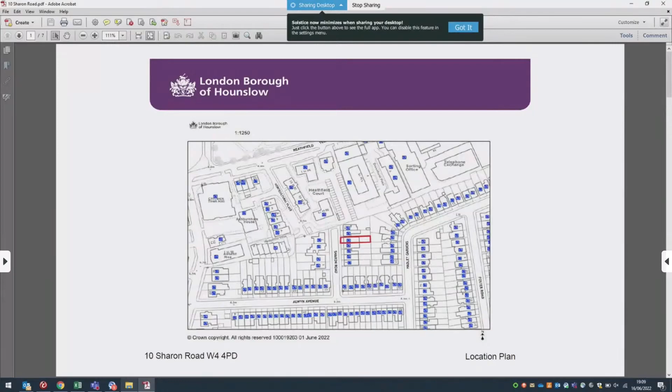Item number 5, number 10 Sharon Road, it's a semi-detached single-family house in the Turnham Green Conservation Area. It is in a flood zone, flood zone 3A.

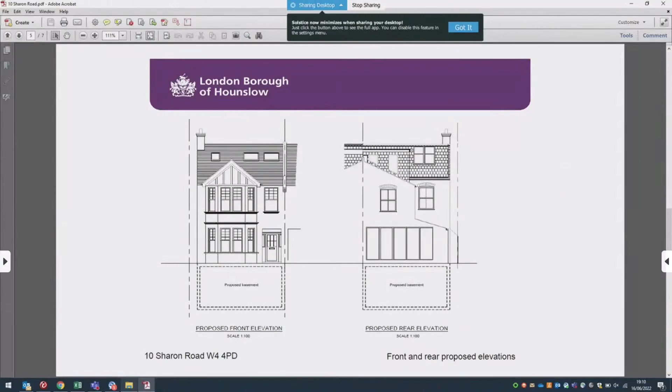The proposal is for the excavation of the land beneath the house to create a basement. It would extend under the entire footprint of the main house and the extension mentioned a second ago. The basement would have internal access to the ground floor level. There will be a front and a rear light well, with a further element of excavation beyond the rear light well into the garden.

We've received 11 representations to the scheme, all objecting. A quick summary of the consultation responses: concerns about flood risk, basements being out of character, the construction impacts of the development, damage to the existing street tree, impact on the structure of neighbouring houses, a lack of need for the basement and the proposed uses, and light emanating from the light wells being visible to neighbouring houses.

Officers are recommending the application for approval. I will come back shortly for the background on that assessment. So back to you, Chair. Thank you, okay.

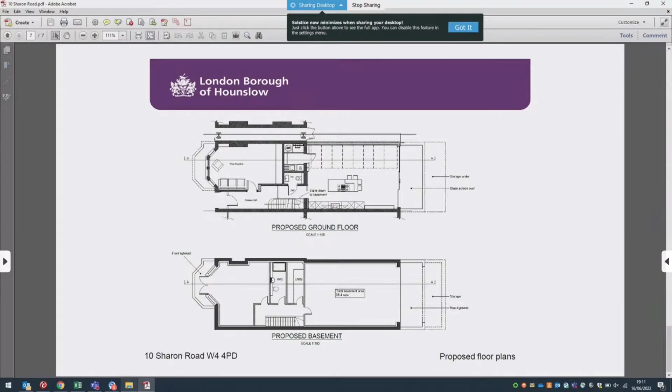I won't be taking up 5 minutes because I think the issue is better outlined by people who live in the road who are here, Tom Irvin and Bob Bond. I'm Councillor Joanna Biddolph for Chiswick Gunnersbury Ward, and I've been in the same position as others here who are here for the first time. I served on the planning committee in my first year, and I remember how I felt at my first meeting, rather at sea.

This is an unusual call-in. Normally, call-ins are about neighbour disputes or big planning applications that are controversial. This isn't about a neighbour's dispute, this isn't NIMBYism, this is actually about policy and is therefore, I think, rather more challenging. You've had a very informative email from Tom Irvin about that. There has also been an update since that in the addendum report, which I don't think Eamon referred to just now. In many ways, that's now more important than the original application because the dispute isn't about a neighbourly issue. I think that's all I need to say, and I'd really like to hand over to Tom and Bob. But it is a policy issue which is a bit more challenging for the planning committee than a neighbourly dispute might be.

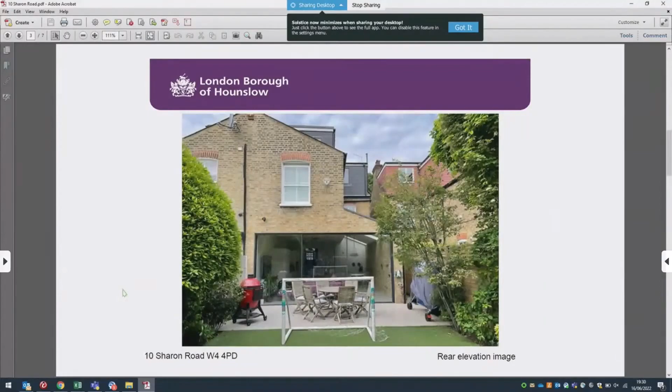Just quickly, you dangled nebulously something in your statement about what questions someone should be asking, and I'd ask you to elaborate on it. So I'm asking you to elaborate on it. That's very kind of you.

Thank you very much. That relates to what I think the planning department may say, which is I had an email last night from one of the officers saying that they checked with the consultant and the consultant had confirmed their interpretation, which I assume they meant about table 4.2 that we've been discussing. It was clear in the questions that the consultant was answering a different question, which essentially was confirming that if there is an existing basement, which there isn't here, then to extend that use would be acceptable as if it was already a less vulnerable use, but to introduce a new highly vulnerable use would not be acceptable.

That is true and it's helpful, but it's not helpful to this application. It's not really relevant to this application. It's not answering the question we need answered.

Thank you. Can I ask the legal, please? This question was asked by Councillor Williams. Is it okay? Can he still stay with that? It seems a bit sort of taken aside. Did you hear that question properly?

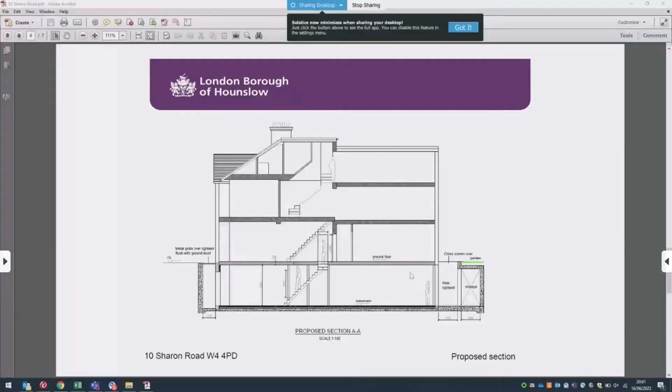Thanks, Chair. Any more questions from members? No? Okay, I'll open it for debate. Anybody? Are we all happy with it? Anybody going to propose?

Chair, I'm happy to move for approval on the basis of what we've heard, following the officer recommendation. We need a seconder. Can I just clarify whether that's including the additional condition to deal with potential noise? Of course, yes, always. Sorry, just on this, what are the conditions we're looking at? The additional conditions that would be useful - Eamon will explain that. Councillor Lal seconded already. Can you explain that, please?

The issue came up about whether there was a need for a sump. So if that need occurs, we'd have a condition that would ensure the sump doesn't create a noise nuisance. It's a fairly standard condition we put on air conditioning units or extraction fans, that type of thing - noise and vibrations.

We'll take a vote as it's been proposed and seconded on the officer's recommendation. Can we have for, please? Okay, 1, 2, 3. Against? Abstentions? It's been carried. Thank you.

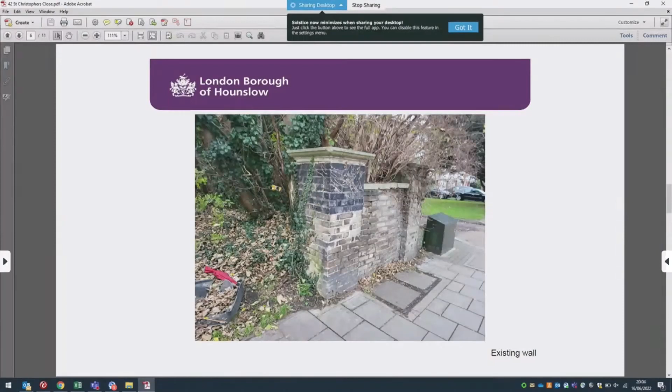It's a 2-storey single-family house, an end-of-terrace house. It fronts St. Christopher's Close. There's a grassed area to the front and the side of the property, running up to the highway, which is not currently enclosed. There's a remnant of a brick boundary wall to the side of the site, which I'll draw your attention to and may come back to later.

Just briefly, a summary of those: they were objecting to the removal of amenity land, the change in visual nature of the open plan estate, obstruction of the public footway, contrary to restrictive covenants on the land, a failure to preserve the character of the conservation area, negative impact on property values, and mention of a fence that had previously been erected without permission. Again, officers are recommending approval.

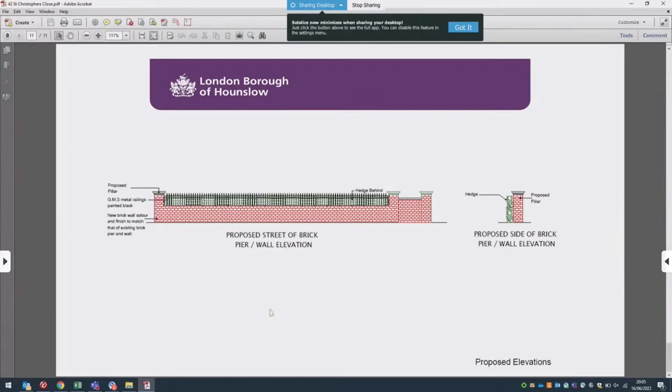Thank you, Eamon. I believe we have 2 speakers on this. Okay, who's going to come, Mr. Foxton first, or? Oh, have we got? Oh, Councillor Chaudhary, I'll give you the first chance. Sorry, didn't realize that, yeah.

And our mayor is going to look after the baby, yeah?

Right, Councillor Chaudhary, 5 minutes when you start.

Thank you. Good evening, everyone, and thank you, Chair and members of the Planning Committee for allowing me to speak on the proposal that I called in. I did this based on conversations that I've had with residents who will be greatly affected if permission is granted. As you can see, it's proposed to close off the green open space that currently, and importantly historically, has graced the area for many, many years. The green space has the precedent of use by the community as amenity land since the construction of these premises, something they've done peacefully. By building this wall, residents will no longer be able to enjoy the open space they've enjoyed for many years. We recognise it's private land, but the communal use should take priority here.

The style and design suggested is not in keeping with the local area. St. Christopher's Close is within the Spring Grove Conservation Area. Therefore, greater care must be taken, because if permission is granted today, then the precedent will follow that future applications will also need to be approved, and will completely change the look not only of St Christopher's Close but also of Thornbury Road, particularly on the east side, which is open and gives a softer appearance at the moment. If that was all walled up, then that would create a tunnel.

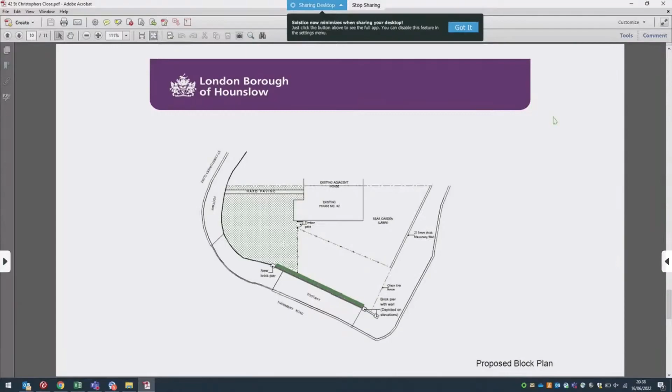It occurs to me that, on the wall and how it looks in planning grounds, personally I don't see any reason, if it's private land and they own it, why you would reject on the grounds of building a wall. I just don't see that it contravenes in any meaningful way, and I think the officer's report reflects that. I do, however, think there is this question about whose land it is, what the rights are, what the uses are - Mike's made that clear. That's a property law issue.

What I would hate is for us to approve it, then build a wall, then find out afterwards that the property law aspects actually said that shouldn't have happened, and then we spend 10 years in enforcement not getting anywhere and all the rest of it. So I guess where I would have come, had we not already moved this motion, is I would have liked to have discussed options around conditions - that before anything gets built, we actually get to the bottom of what the property law status is, and that we're in a position where an application cannot be enforced if it is in fact in contravention of property law.

And that we get that bit of work done first, and that there's some sort of condition to that effect. Because in planning terms I don't see an objection to it, but the point is this is a piece of land that there is a dispute over whose land it is, and whether it is public land, and whether enough time has passed that it's no longer private land. I would like us to bottom that out. But on the planning grounds, I personally don't see any reason for rejection. I would vote to approve, but on the basis that we get that other piece of work sorted out first. So that was what I wanted to say in this debate anyway. Okay, Councillor.

I'd just like to say that regardless of the unclear situation on who owns the land or what the public access to the land is, my personal view is it shouldn't go ahead. When I went to see it and visualized where the wall would be, I think it would fundamentally transform the visual nature of the estate, and for that reason it's inappropriate. So I'd oppose it regardless of the situation between ownership or use of the land.

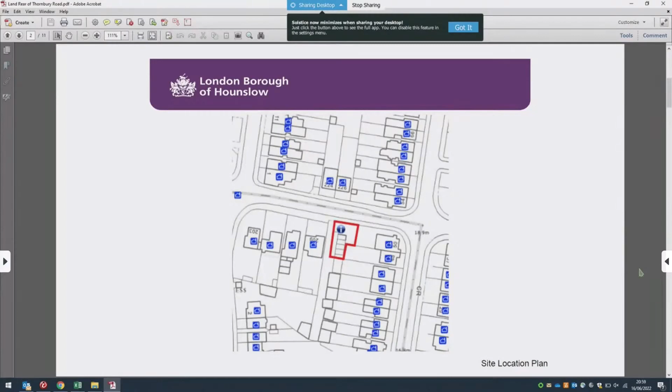The application being considered under this proposal is for the demolition of the existing garages at the rear of the site at 50 Thornbury Road and the erection of a detached two-storey, three-bedroom property with associated cycle parking and bin storage. The application has been called in for determination by Councillor Luki, located in the Osterley and Spring Grove ward since the recent boundary changes, and within the Spring Grove conservation area on the corner of Thornbury and Spring Grove Roads.

As you can see in the pictures, these are the existing garages on the site, which are currently underutilised, representing a brownfield site suitable for development. The surrounding area comprises a mixture of semi-detached and detached properties on modest plots.

Five responses were received in relation to this application, summarised as follows: the proposal would be inappropriate for the plot, the location and the line of houses on Spring Grove Road; the proposed dwelling would overlook, block light and affect outlook for neighbouring properties; there is no room for additional homes behind any properties on this section of Thornbury Road; the application site is fundamentally unsuitable for residential development; harm to pedestrian and vehicular safety; and the applicant has failed to demonstrate the proposal complies with all requirements of the local plan, with the proposed access considered unsuitable.

Several amendments were sought during the course of this application, the main one being the removal of off-street parking from the proposal, as its location close to the bus stop would have caused serious harm to pedestrian and highway safety.

The application is recommended for approval by officers. It represents a development which is acceptable in principle, utilising a small brownfield site within a sustainable location for development. It is a high-quality form of design which would preserve and enhance the character of the Spring Grove conservation area and would not be out of keeping with surrounding properties.

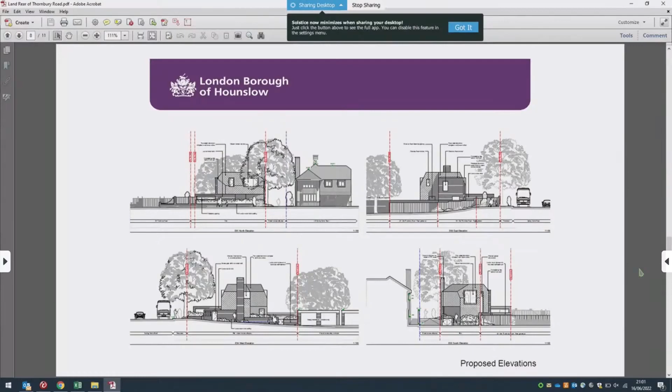The dwelling would have a gross internal floor area of 136.7 square metres, complying with the nationally described space standards, and would provide policy-compliant 82.8 square metres of private amenity space. As mentioned before, it would be a car-free development, and given the size of development, it is not considered it would result in excessive parking stress. Bin and cycle storage would both be provided in accordance with policy. There's a 67.45% reduction proposed over baseline emissions, and the proposal includes solar panels and heat pumps.

So as I said before, it's recommended for approval by officers. Thank you. Thank you, Sophie.

Questions from members? Councillor Alpost. Well, Chair, it's a question regarding the garages: who do they belong to, and have there been any reports of antisocial behaviour or the like at that site?

So the site is in ownership of the applicant. They bought the backland garages as a potential development site, and as I mentioned in the officer's report, there's been no reports of antisocial behaviour, and the garages currently aren't in use as car parking, so it's not considered that demolition would result in any excess parking stress within the surrounding area. Thank you.

I recommend this for approval. There are no possible reasons to object. Okay, can I— it's almost an abuse of the calling system, with respect.

Okay, thank you. It's been proposed for approval. Somebody seconding that? No, hang on, we'll carry on the debate. Okay, somebody— Councillor Luki, hold on a second, it's been proposed, seconded, now we're still debating it. Carry on, you can ask your question. Chair, we weren't debating it, we were asking questions of officers, and then you move whatever you want to move, Councillor Todd. I think you're indulging Councillor Todd, Chair, but you're not indulging me.

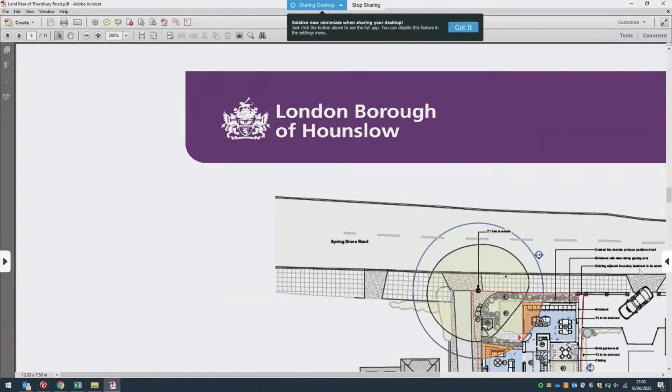What's your response to that from our old friend Mr. Marbrow? Yeah, so as you can see if you go towards the ground floor plan, the access has also been amended during the course of the application. Access was originally from the rear of the site, but it's been amended to come from the front. So although the entrance is not directly off Spring Grove Road, from the point there's an entrance gate, which is clearly visible from the wider public realm.

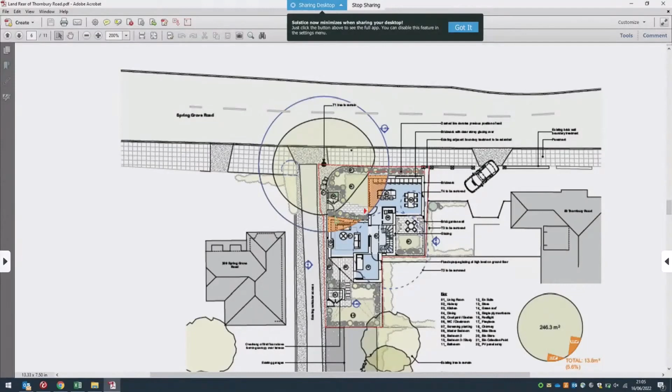It won't be obviously if you go back to the photos of the site. Sorry. You can kind of see that point where the bushes are is going to be where the entrance is, so it will clearly be visible from the public realm.

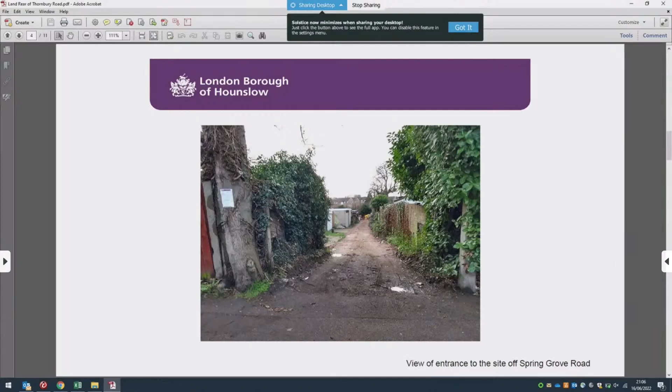Okay, thank you, Sophie. Any more questions from members? Quickly for debate, everybody.

No, Chair. Just to quickly say, I sympathise with Councillor Todd on this one. In sort of national, regional, and local planning terms, this looks like a no-brainer in terms of we're replacing garages with a house. People often say we don't build enough detached multi-bedroom houses, and that's what we have here.

We have a motion to approve. We have a seconder. I really do think we should just get this one done. Thank you, Councillor Williams. Yes, we have a proposal and a seconder. Can we take a vote for the approval, please?

Against? Abstentions? Well, just fine, I have to carry on.

Thank you. Can I just say, this is why we have a planning committee. People can refer items. This is for new members of the planning committee. People can ask for a call in, and that's what we did just now. That's part of the democratic process.

Thank you, they might- Tony. Yes, that's- they've been told, really, in that training. I think everybody attended the training, yes?

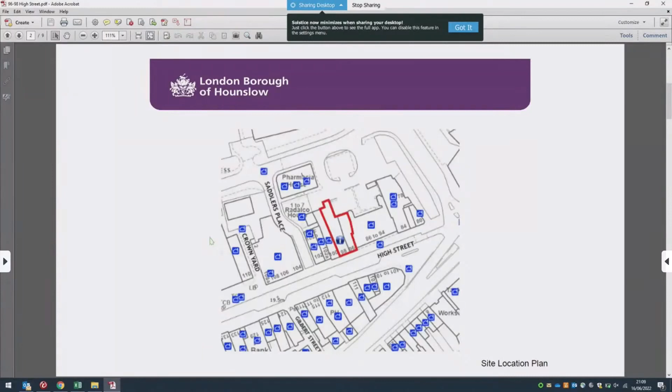The site is located on the northern side of Hounslow High Street and contains a 5-storey building, which is the subject of this application, and a service yard to the rear. It lies within the Hounslow Town Centre metropolitan area and is designated a secondary shopping frontage. No responses from the public or consultees were received for this application.

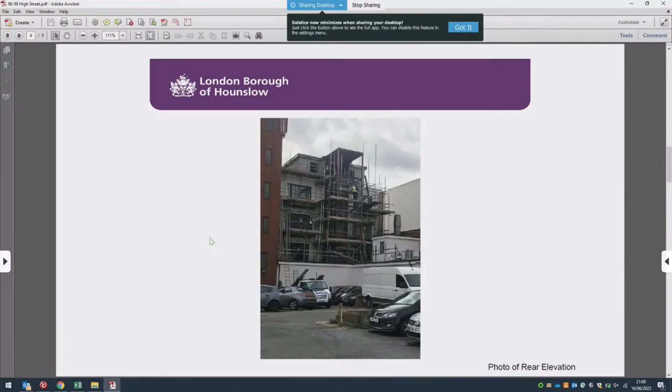The development is acceptable in principle. It has the same design and appearance as proposed in the previous 2015 application. The material palette would be acceptable and there would be no harm to the living conditions of neighbouring properties. The proposal would be car-free and includes 18 cycle parking spaces, secured by condition, along with waste storage details, which is also considered acceptable.

The development achieves a 47% reduction in carbon emissions, which, given the limited scope and retrospective nature of development, is considered acceptable and has been confirmed by the council's energy consultant. The fabric specifications are considered better than baseline, and the proposal would incorporate solar panels to comply with the green energy hierarchy. The carbon offset payment required would be £11,896, secured by the Section 106 agreement.

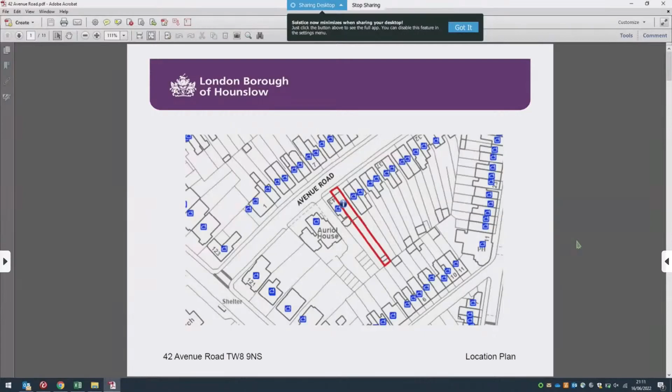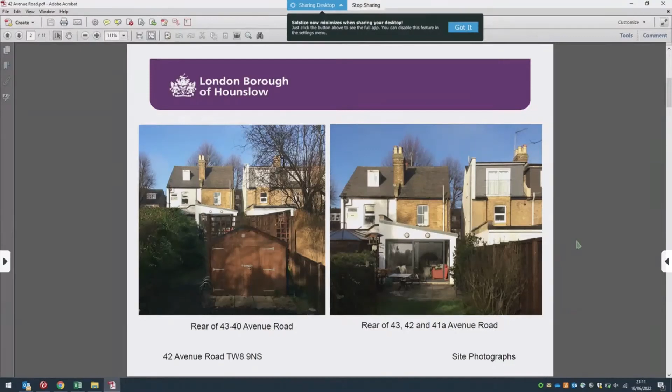Thank you, Chair. The application site is a 2-storey semi-detached dwelling on Avenue Road. The application is being heard at committee because the applicant is a former councillor, and at the time of the application was a sitting councillor. If you can move on to the photos - you can see the 2-storey semi-detached. There are a number of extensions within this area, including single-storey rears, rear dormers and front dormers as well.

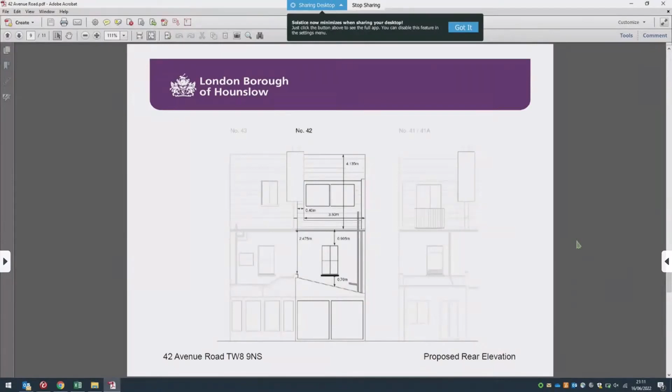The proposal is for a rear roof extension, incorporating a rear roof dormer and 2 rear windows. There are the rear elevations, existing and proposed. No representations have been received on this application. The proposal is considered acceptable in principle and would not result in harm to the living conditions of neighbours, given its proposed scale and positioning. It is not considered to harm the character and appearance of the area, as it would match the design of the neighbouring extension at 41A, and would be a modest extension subservient to the host dwelling.